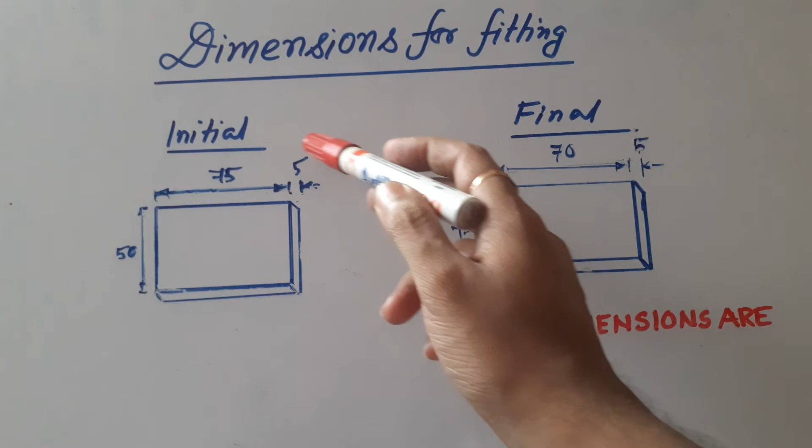So I have described that you have to apply chalk over this mild steel specimen and then use a scriber, that is a marking tool, along with a scale, to mark on the mild steel specimen to the required dimension. Our required dimension is 70 mm by 45 mm by 5 mm.

The thickness will remain the same, 5 mm to 5 mm. I have to reduce 5 mm of length, from 75 to 70 mm. I have to mark that with the scriber and scale, and then reduce the breadth also by 5 mm, from 50 mm to 45 mm.

So I have to mark it, and then fix that workpiece, as you have seen in the video, in a bench vise. In that video you can see the bench vise has one fixed jaw and another movable jaw.

Once I rotate the wheel, that lever, anti-clockwise, the movable jaw comes apart from the fixed jaw. Again, if I want to tighten the workpiece inside both jaws, I have to rotate the lever in the clockwise direction.

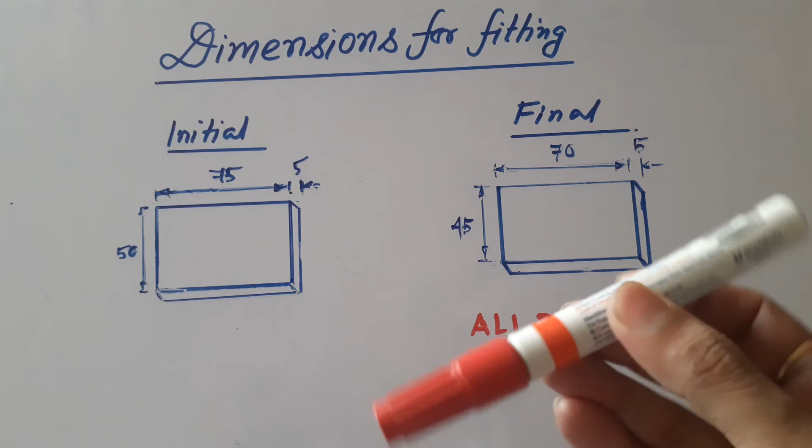Now after gripping the job or workpiece inside that vise, I have to do the filing operation. I have already described cross filing, draw filing, and the use of smooth file and rough file. First you should use a rough file and cross filing process to remove more amount of material.

So by that way we will get the final shape of 70 mm and 45 mm, and as usual no changes in thickness, so that will be 5 mm. That's all about the calculation regarding the dimension for the fitting job.

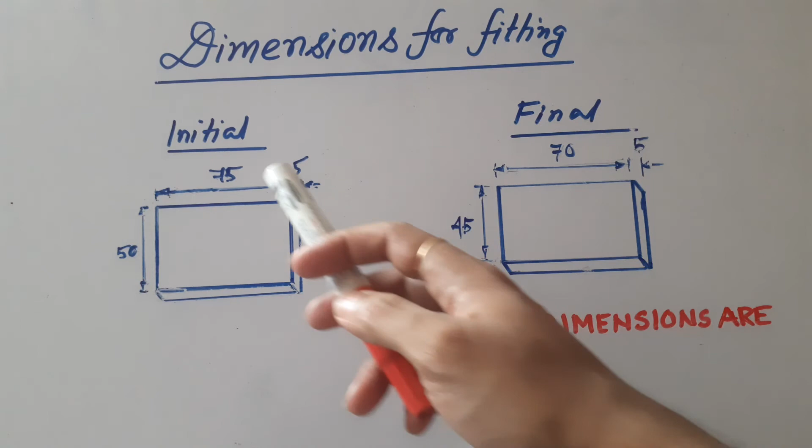Now what you can do, it will be like a homework. First you have to calculate the initial volume for this initial shape. That means you multiply 75 into 50 into 5 mm, and you will get the volume. Initial volume you can name as V1.

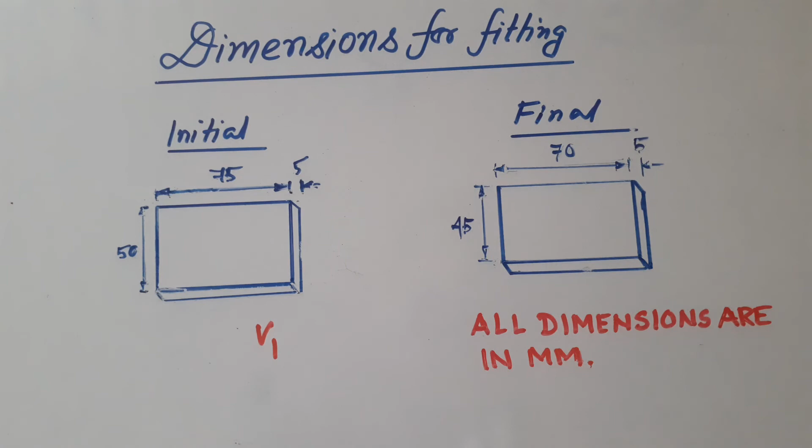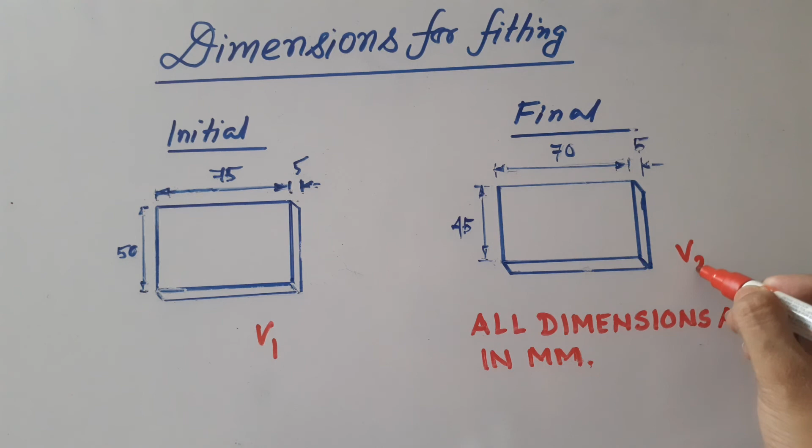After the machining process, after the filing process, whatever final value you get as the dimension, you have to multiply all three things, then you will get the final volume, that is V2. Now if you subtract V2 from V1, then you will get the volume

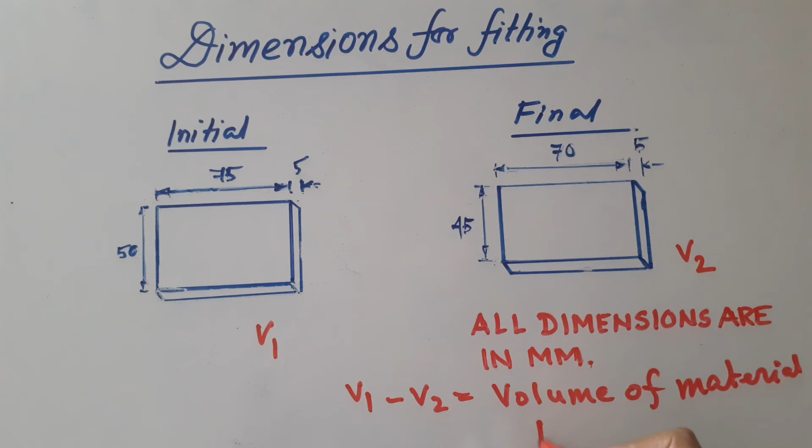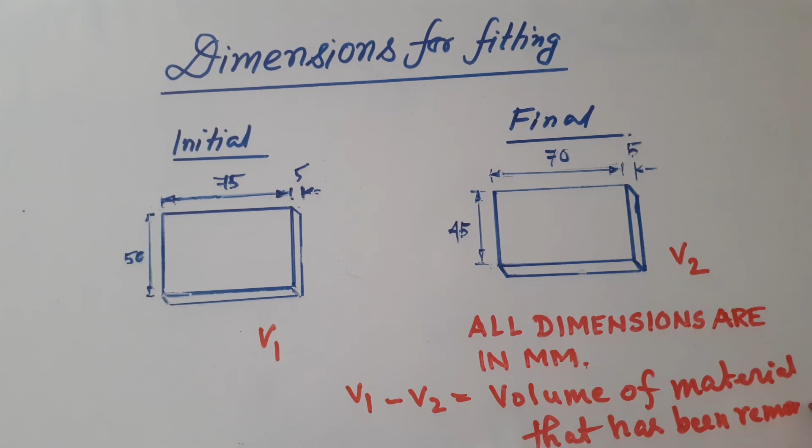of material that has been removed. So volume of material that has been removed, you can find it out.

Now if you want to find out the mass, that means how much mass has been removed, we know a formula, that is rho or density is equal to mass by volume.

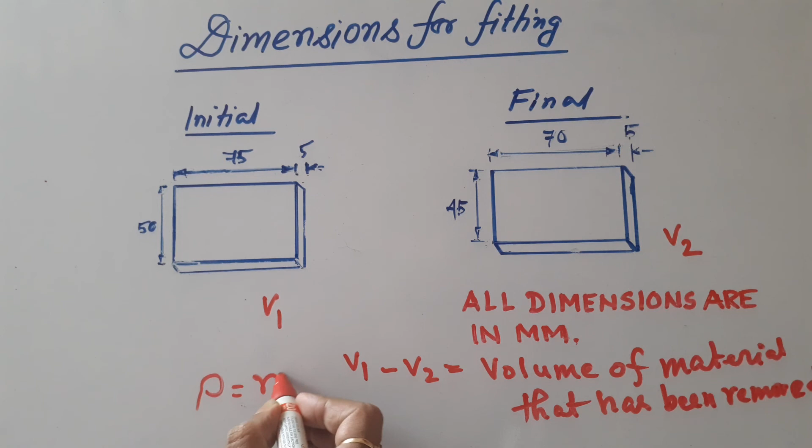Now if you want to find out the mass, you have to multiply the volume with the density, and you will get the mass. Likewise, for the initial volume you calculate the initial mass, and for final volume V2, you calculate the final mass. Then initial minus final, you will get the amount of material or mass of material that has been removed.